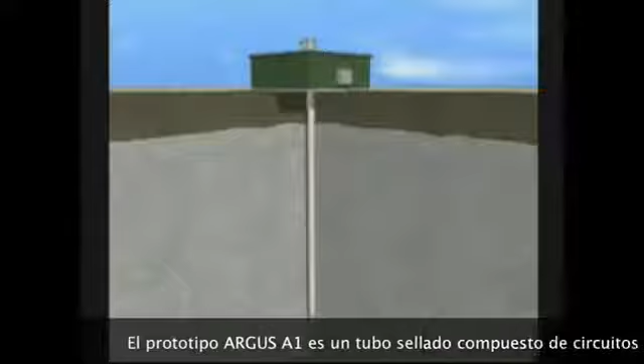The Argus A1 device is comprised of two closed-loop circulating circuits. In the first, the heat is brought to the surface from the depths of the Earth by a patented thermal riser.

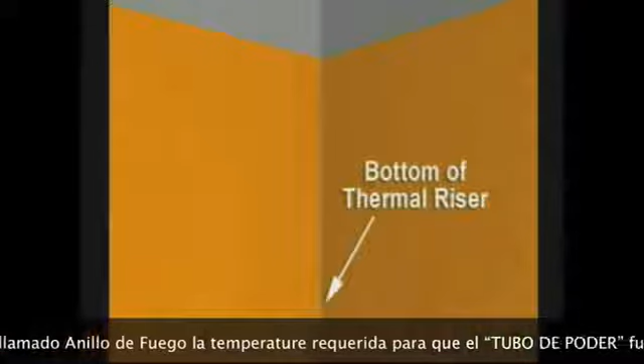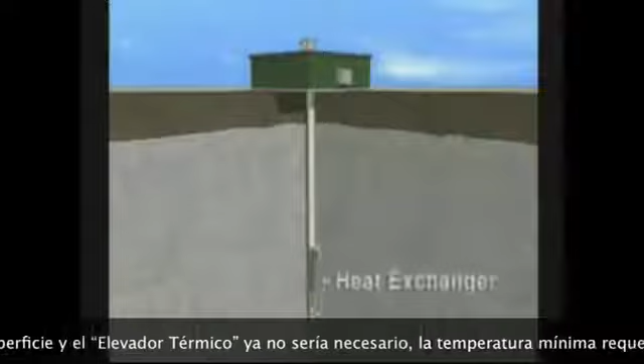In many parts of the world, especially those in areas denominated as the Ring of Fire, the temperatures required to operate the power tube are closer to the surface. Therefore, in many cases, the thermal riser is not required. The required minimum temperature necessary is 300 degrees Fahrenheit or 148 centigrade. The power generating system operates at 10,000 RPM and needs only 225 degrees Fahrenheit or 108 centigrade.

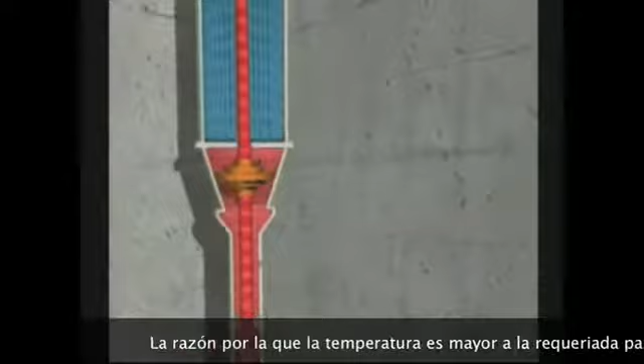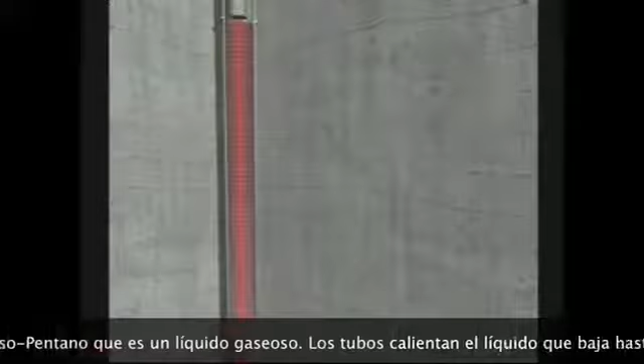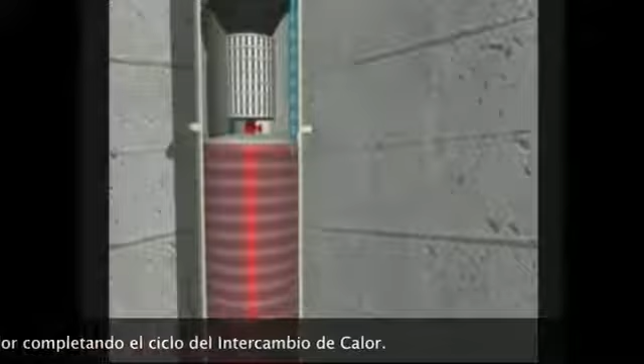The resource temperature is higher than the operational temperature when you take losses from the heat transfer into account. The heat loss is a factor when you are transferring heat from one source to another. The heat from the thermal riser is transferred to the heat exchanger. This is the start of the second closed circuit cycle. The heat exchanger contains 6,600 feet of specially designed stainless steel tubing, which contains a formula of isobutane isopentane liquefied gas. The tubes in the heat exchanger are bathed in heat exchange fluid that circulates down to the bottom of the thermal riser and returns to the heat exchanger, completing a heat transfer loop.

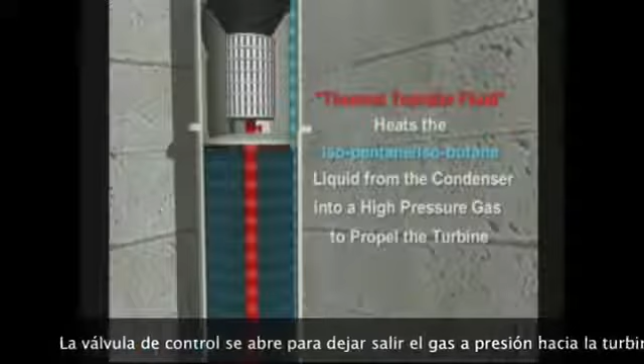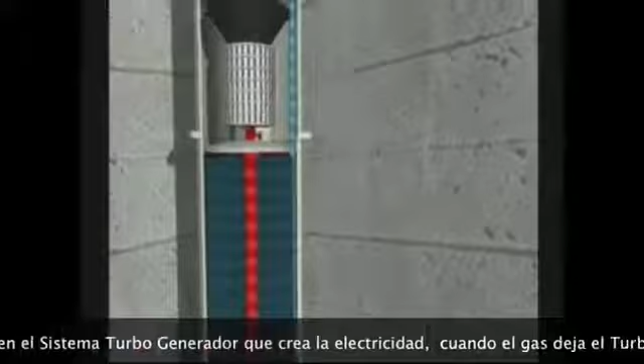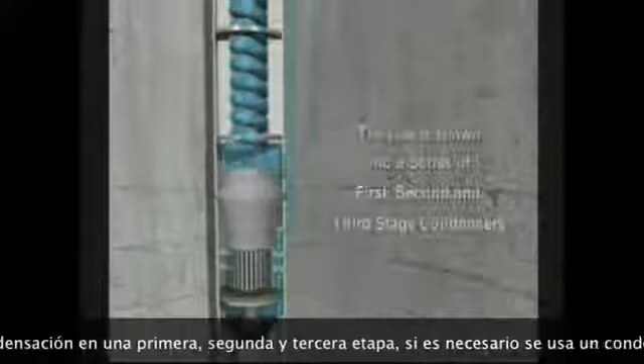As the throttle control or valve opens to release the compressed liquids into the turbine chamber, they become a gas, which propels the turbine, directly coupled to the generator in the monocoque turbo generator system. This creates the power. As the gas leaves this monocoque turbo generator system, it goes through the condenser system, the first, second, and third stages.

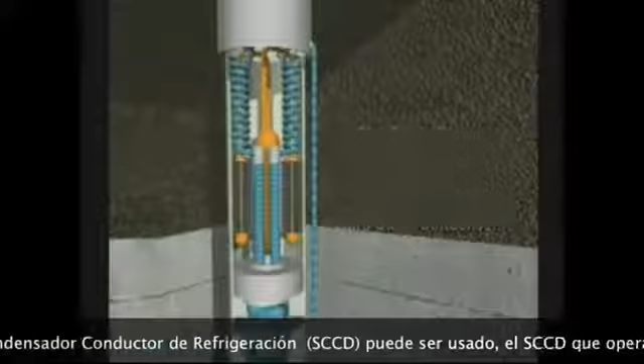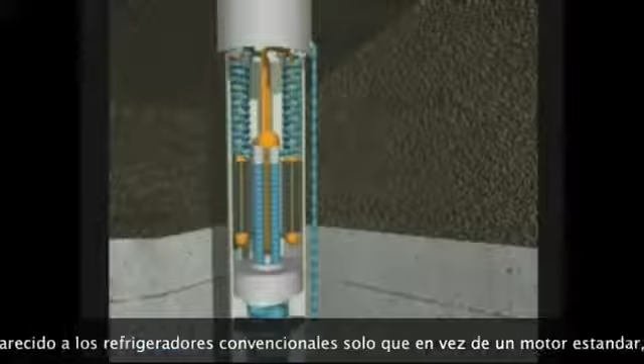In certain cases, an additional condenser, or the SCCD, called the supercooling condenser driver, may be used. The SCCD operates by compressing a gas, much like a refrigerator works, but instead of the standard motor or turbine, it uses sound, which eliminates moving parts and requires a lot less energy.

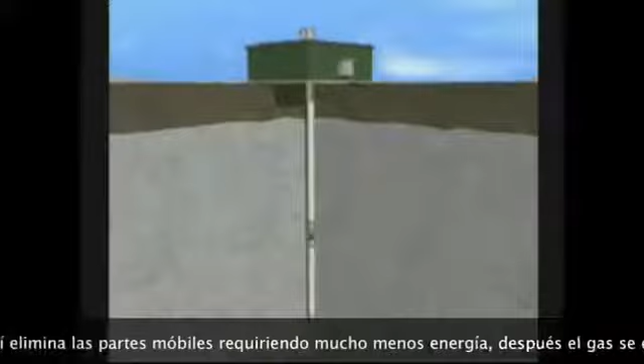After the gases are cooled and transferred to the equalization tank, they are then pumped back to the heat exchanger, where they start their closed circuit journey again.

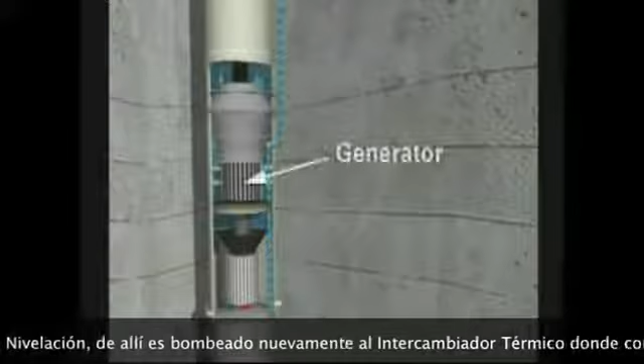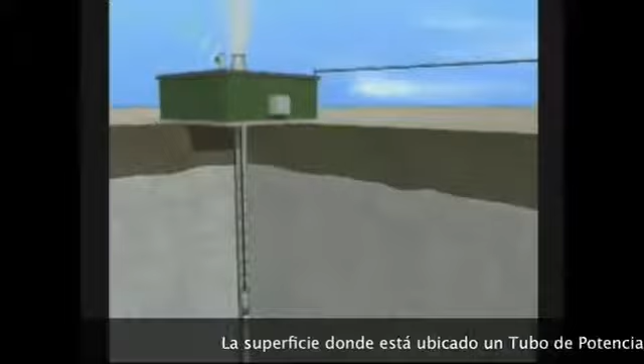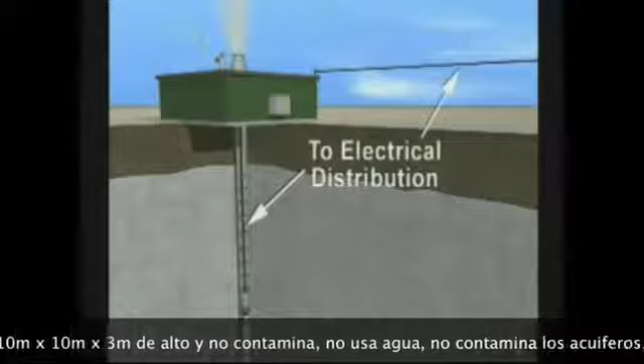The surface footprint of a 10 megawatt power tube is only 10 meters by 10 meters by 3 high. There is no pollution, no use of water, no aquifer contamination, and no unsightly structures, and the installation is rapid.